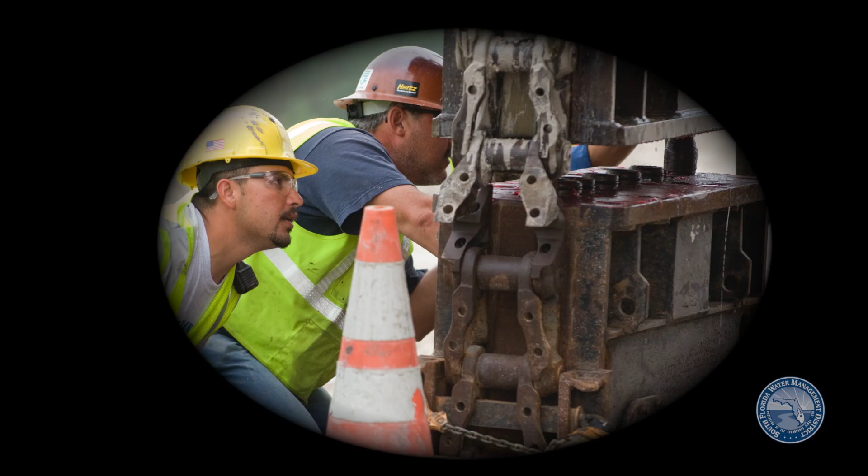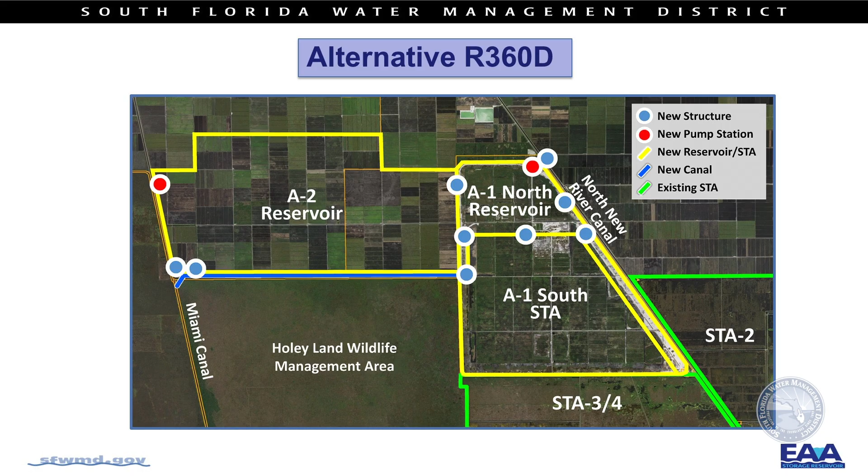The South Florida Water Management District began work on the Everglades Agricultural Area Reservoir the day Governor Rick Scott signed Senate Bill 10 into law in May 2017. Since then, professional engineers, scientists, modelers, and water managers worked to develop alternative options that meet the letter of the law. The alternatives feature different configurations of reservoirs and man-made wetlands that clean and store water to help protect the St. Lucie and Caloosahatchee rivers and estuaries from damaging Lake Okeechobee discharges, while increasing restoration flows to the greater Everglades, consistent with the Comprehensive Everglades Restoration Plan, or CERP.

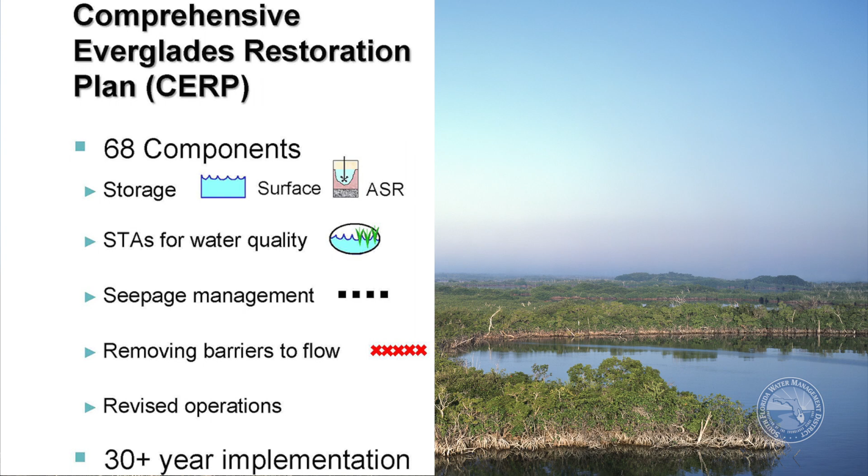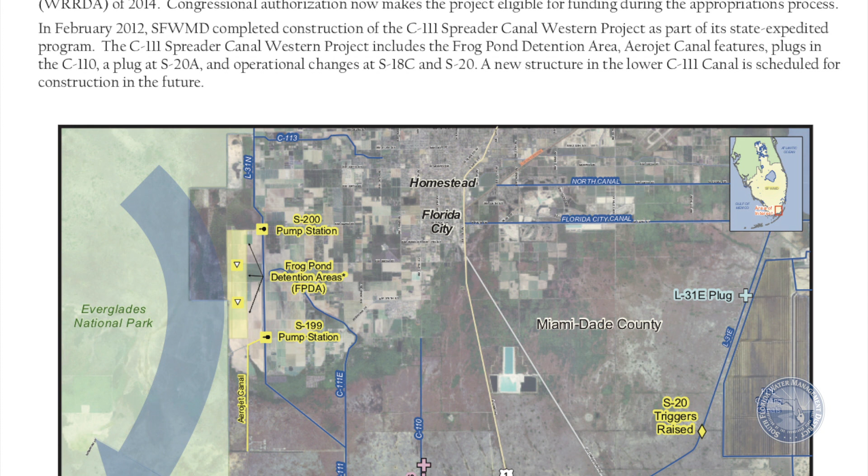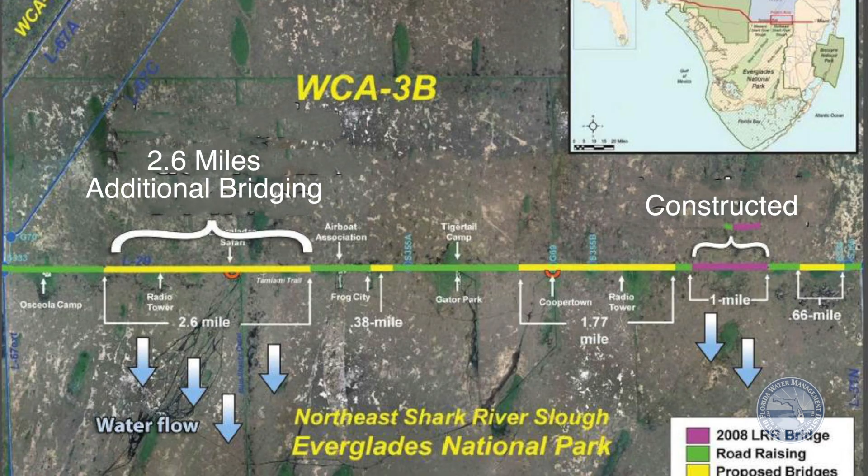Completing projects included in CERP and the Central Everglades Planning Project are critical to moving water south from the new reservoir. The C-111, Modified Waters, and 8.5 square mile projects need to be completed by federal restoration partners and in operation first because they are designed to open up the southern end of South Florida's water management system to allow water to move south. All 5 alternatives, including 2 deemed as cost-effective best buys, were presented to the public, the South Florida Water Management District Governing Board, and the Florida Legislature.

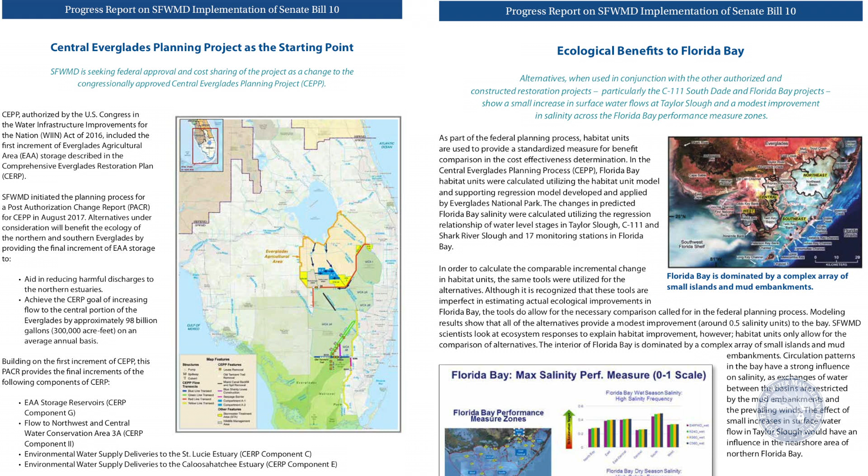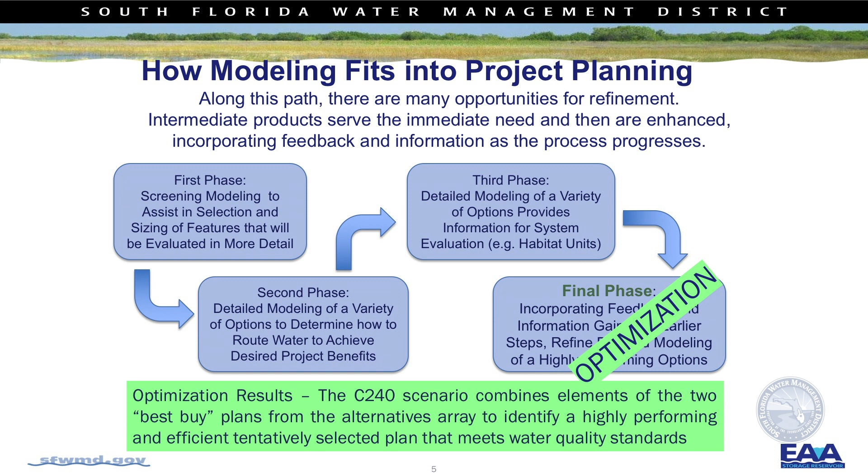Following South Florida Water Management District's presentation to the legislature in January, the agency received a clear mandate to further optimize the best buy options. The South Florida Water Management District Governing Board has unveiled a single plan that maximizes the benefits of the EAA reservoir best buys that were previously presented. Optimized Alternative C-240A, known as the tentatively selected plan, was introduced to the public at the South Florida Water Management District Public Governing Board meeting in Orlando on February 8.

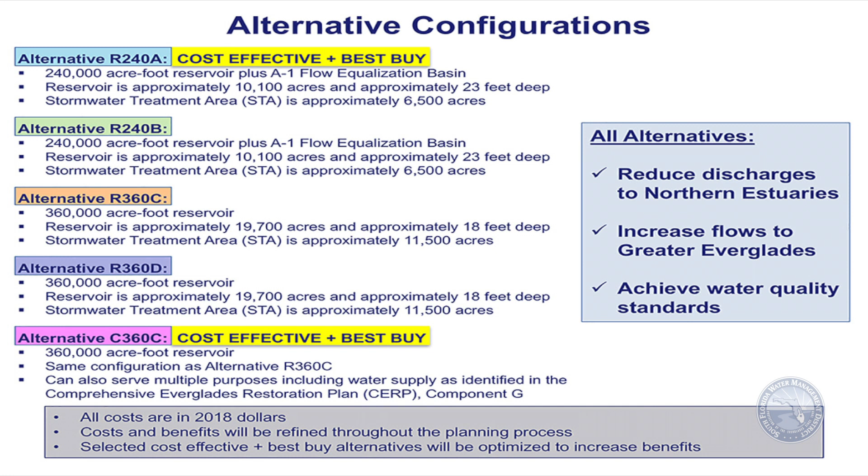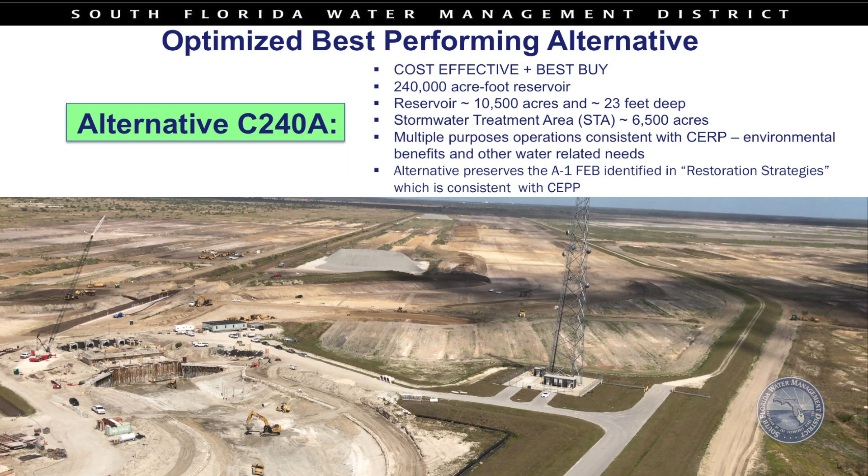The plan borrows aspects of the previous 5 alternatives and combines them into a project that can hold 240,000 acre-feet of water in an above-ground reservoir. The reservoir itself spans 10,500 acres and would be 23 feet deep. When combined with related storage projects in Governor Scott's Restoration Strategies Plan, a significant total of 350,000 acre-feet of storage will be available south of Lake Okeechobee.

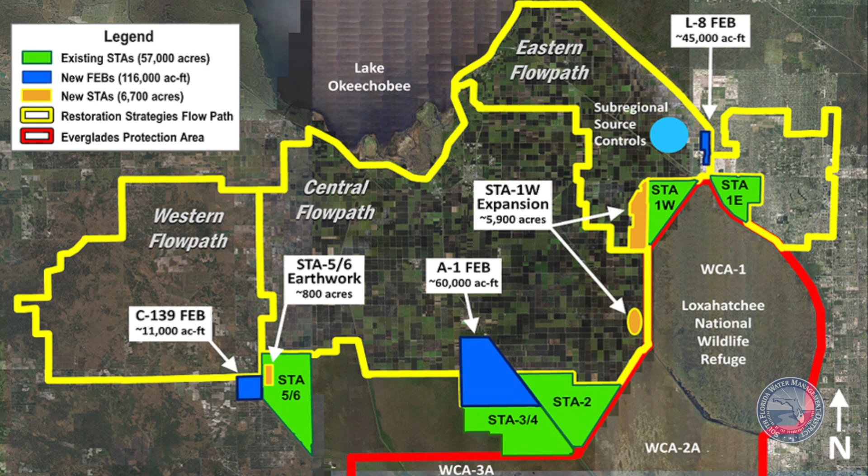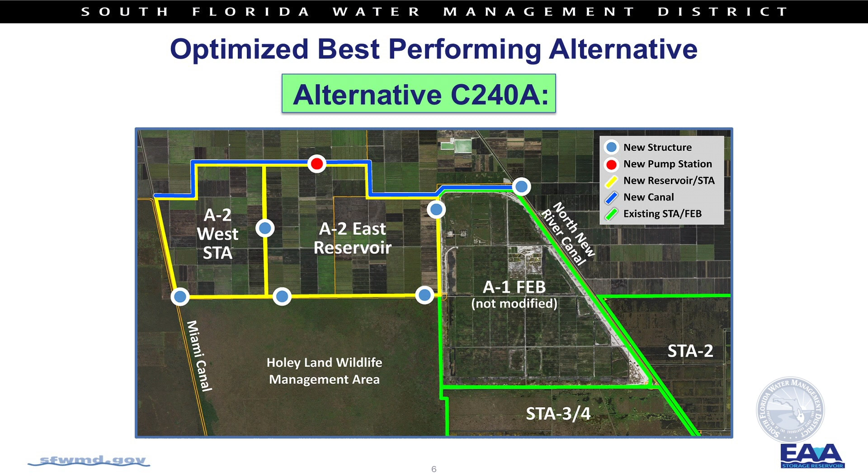The suite of Everglades water quality improvement projects in Governor Scott's plan will create more than 6,700 acres of new water cleaning wetlands and 116,000 acre-feet of additional water storage. Only when these critical projects are complete will the full benefits of the EAA reservoir be realized. The tentatively selected plan includes a 6,500-acre stormwater treatment area, which uses plants to clean nutrients such as phosphorus from the water. This new wetland system, in combination with other features, will ensure the new water delivered to the Everglades meets state water quality standards.

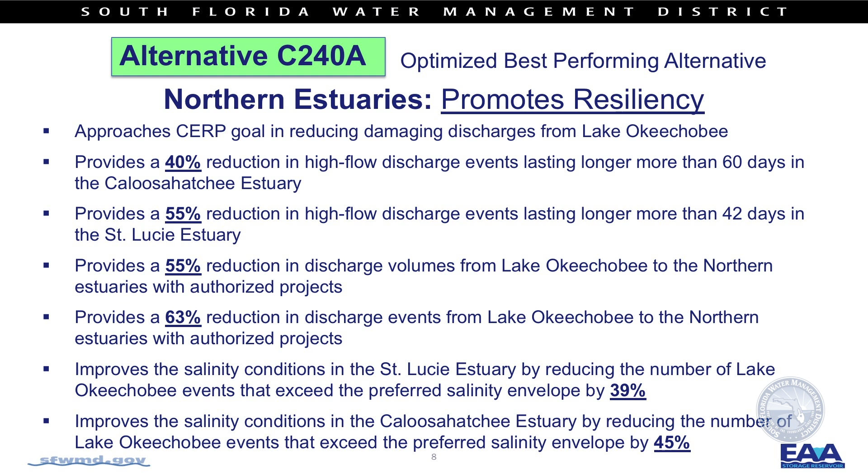The plan also provides an annual average of 300,000 more acre-feet of clean water south to the Everglades. C-240A contains an array of benefits, including a 63% reduction in the number of discharge events from Lake Okeechobee to the northern estuaries when used in conjunction with authorized projects, a 55% reduction in discharge volumes from Lake Okeechobee to the northern estuaries, working in concert with other authorized projects, improved salinity conditions in the St. Lucie and Caloosahatchee estuaries, and an increase of flows to an annual average of 370,000 acre-feet in the Central Everglades. These additional flows will be reserved for the natural systems by rule or reservation and also meet state water quality standards.

The tentatively selected plan restores wildlife habitat, increases overland flow to Everglades National Park, and provides modest benefits to salinity conditions in areas of Florida Bay. The plan also improves conditions for Lake Okeechobee, including improving the amount of time the lake is at its optimal level for its ecology to thrive, decreasing the number of extremely low-level events in the lake.

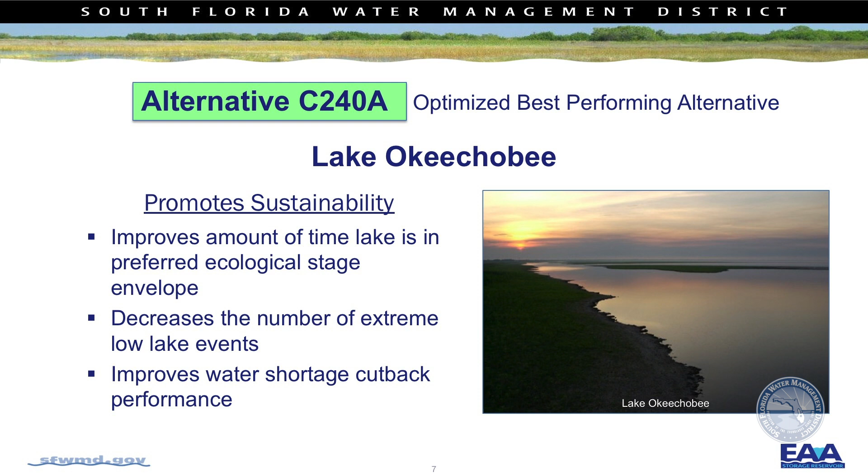The next step is to complete an independent external peer review of the plan, along with related agency reviews. The South Florida Water Management District would then submit a report to its partners at the U.S. Army Corps of Engineers by the end of March. The South Florida Water Management District is committed to delivering the environmental benefits of this project and meeting the requirements of state law.